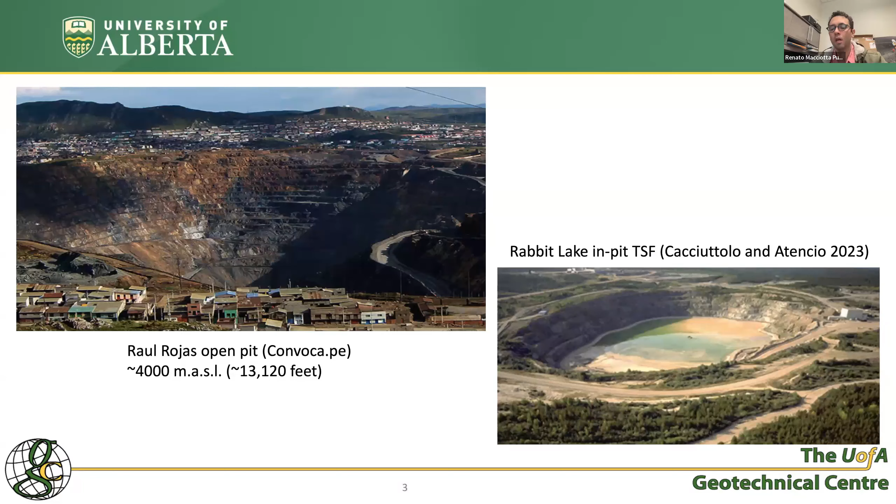Because if we're not, then we are increasing the likelihood of a mishap, of an incident from occurring. Okay, so that's the safety share for today. I hope you took the lesson, and I hope it's a free lesson for you. I had to suffer my back that day to learn the lesson by heart, but I hope you take that home today as well as what I'm going to tell next.

For this lecture, some of the contents will start with the context of open pit wall design. What is it that we're trying to do with these designs? I'm going to talk about uncertainty and design reliability. And then I'm going to talk about the specific work we did with the LOP on design acceptance criteria that considers that design reliability.

So let's talk about the context. When we talk about open pit slope design, we're typically talking about the design of these slopes at three scales, right? We're talking about the bench scale, the interramp, and overall. What's a bench? A bench is just a slope that is typically 8 to 15 meters in height, although some operations can have double benches, but let's not dwell on that. And then there's a space in between the next bench.

Their main purpose is to be a control for rockfall. Okay, so to try to catch any rockfall, any failure that would occur at the bench scale, and prevent it from reaching the working floor, the working level. It has, depending on the location, other objectives, such as helping you manage surface water. But in essence, for the most part, it has to control rock.

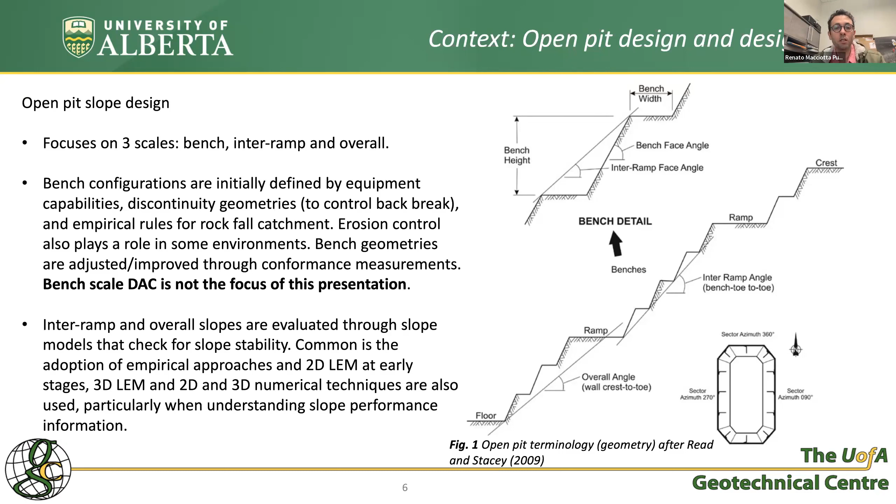Lately that has been implemented to optimize these designs as we transition in open pit mining from a prescriptive approach, in which factors of safety and probabilities of failure from slope stability calculations dominate, to a more performance-based approach. What do we know about the behavior of the slope? Can we monitor it? Is monitoring telling us that the performance is adequate? But the role of modeling and calculating still is prevalent in industry, and it's still a very key role in the initial stages.

So how do we get to a slope stability analysis? What you see on the right-hand side I've borrowed from the design workflow in the LOP guidelines for slope stability, for open pit slope design, from 2009. Of course, you have field data that then gets interpreted into geological models, structural models, rock mass models and characteristics, and hydrogeology.

And then all of that information has to feed the engineer with what are the potential deformation and failure mechanisms, because that is going to rule what assumptions and simplifications you need to make from the geological model, structural model, rock mass model, and hydrogeological model, so that you can build a geotechnical model that is practicable for your analysis but that captures the potential deformation modes and failure modes.

And based on that, you start building your domains, strengths, structures for that model, and then design sections, etc. And that's how you reach that level where you start carrying out the stability analysis.

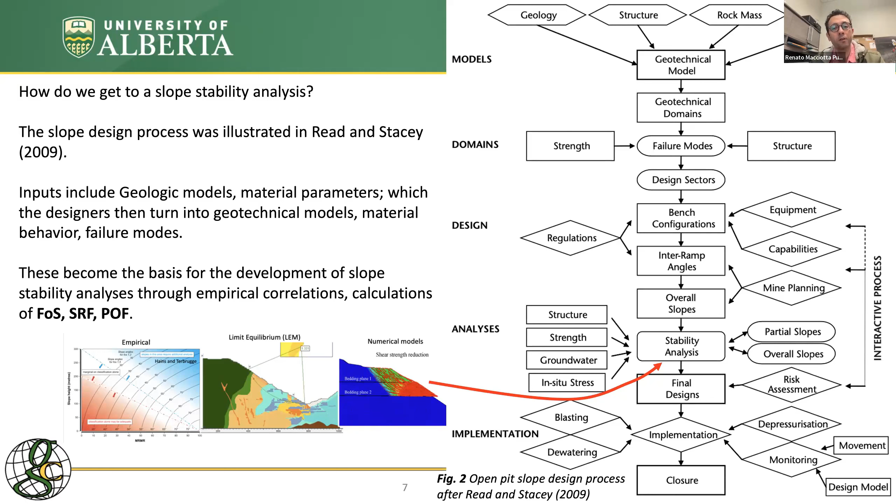Now we start the stability analysis, which I said is governed by empiricism at the initial stages to give you a ballpark of what's going to be the geometry, and then you move towards limit equilibrium analysis, typically in 2D. When you find an area that needs to be prioritized, that needs a bit more scrutiny, more work, or if you have some failures, then you move towards numerical techniques to calculate strength reduction factors in 2D or 3D.

Now, of course, to be able to decide if a slope is safe enough or not, we need criteria. There's been criteria proposed in the past. Many people have proposed criteria in the past.

But that was summarized and somewhat synthesized in those 2009 guidelines by Read and Stacey. That was based on all that published data, experience from them both, and the people involved in those discussions, and it was part of the LOP. So you can understand that many representatives of the operations were present in those meetings. What you see here in that table is what they came up with. You have values of factors of safety and values of probabilities of failure.

For example, if we look at the slope scale for overall stability, very wisely, they are giving you guidance depending on the consequence of the failure. If the consequence of failure is minor - there's not going to be anyone working on that side, the slope is near final, or there's no mineral associated with that slope because you've already taken everything you wanted, there's no interramps going through there, no structures, no people exposed, and it's low risk - you can be a little more aggressive with your design.

But if there's a good ore body there that you want to extract, or if you have a key ramp going through that slope, or if for whatever reason you have your main crusher at the crest or toe of that slope, then it's a very high risk. So you cannot be as aggressive with your design.

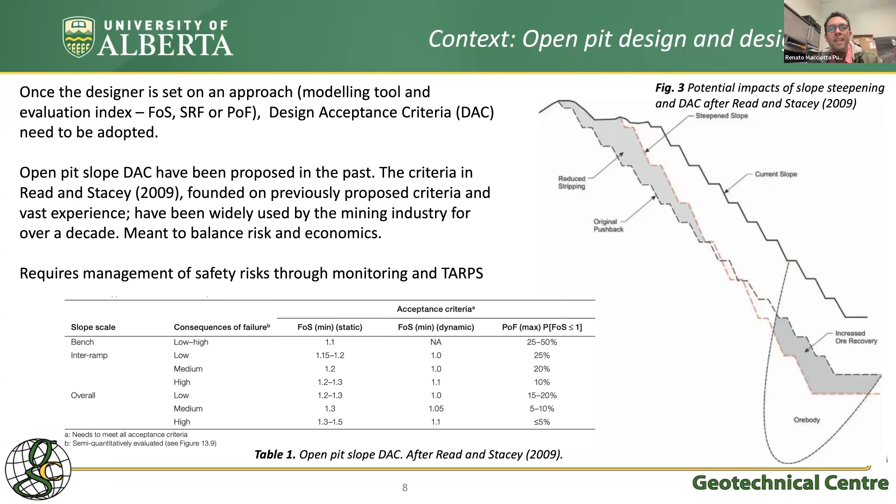Those two calculations with those two models are going to be very different. One is going to have very low reliability—very, very low confidence on those numbers. The other one you're going to feel much better about. So that's what was not captured here, that uncertainty associated with some of these analyses.

So what is uncertainty? What is design reliability? I'm going to show you what I call a working table. I've presented it a couple times, but I have not invented it—I've borrowed it and Frankensteined it from other people, mostly from Dr. Morgenstern's 1995 work, where he talked about categories of uncertainty, and from Steffen et al. in 2008, where he talked about sources of uncertainty. And then this is what I put together.

On the left-hand side, I've put this typical staging, which includes design from conceptual towards operations, towards design for closure, etc. When I talk about design during operations, I'm talking about subsequent phases of an open pit excavation. I've put these as well for tailing storage facilities and for natural hazards. For tailings, for example, if you need to do subsequent raises of your tailing dam, this is applicable as well through operations—uncertainties through implementation and operation, and uncertainties through closure, implementation, and post-closure.

So for each of these stages, we have sources of uncertainty, and the components include the geological setting, rock mass, soil, rock structures, tailings. We have the loading and unloading for performance analysis. And for each component, we'll have certain sources.

When we're talking about the geological setting, what are the possible sources of uncertainty? Topography, not so much, but there's some source there. For sure, the geomorphology—if you're in an area like some of the pits in the Andes in Chile, for example, very thick layers of materials carried by ancient rivers that got really solidified there. So uncertainties with that geomorphology, uncertainties associated with lithology, and even with weathering and hydrothermal alteration.

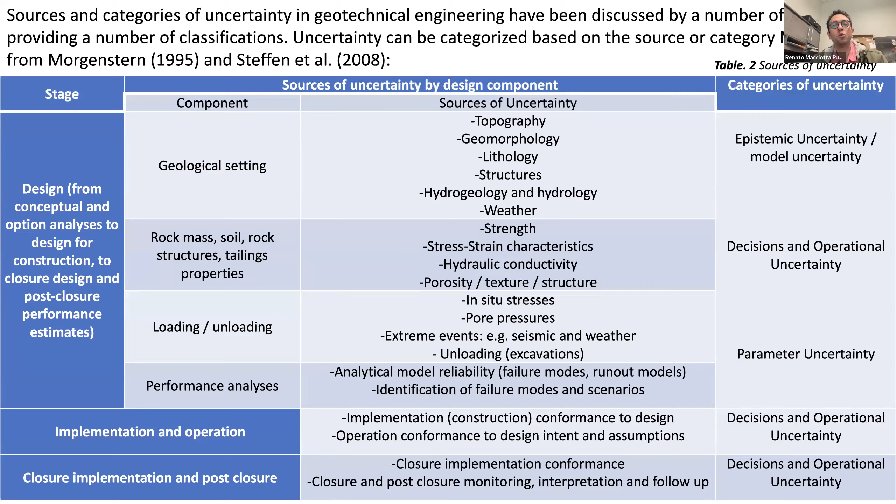And the other type of uncertainty is what I call here decision and operational uncertainty, what used to be called human error. That has to do with the decisions we make - for example, through the definition and interpretation of these geological structural models. How do we do the interpretation? There can be error from practitioners there, but also decisions we make during the analysis and interpretation of the analysis results, and decisions we make with regards to implementation and interpretation of monitoring.

So that's a big one, okay? And it's very difficult to deal with. We're not going to talk about that in detail in this presentation. Just know that that's why we have our system managed - our safety management systems, our design management systems. That's why we have peer reviews, senior reviews, external audits, technical audits, and external review boards. All those layers of protection are meant to reduce human uncertainty in this workflow.

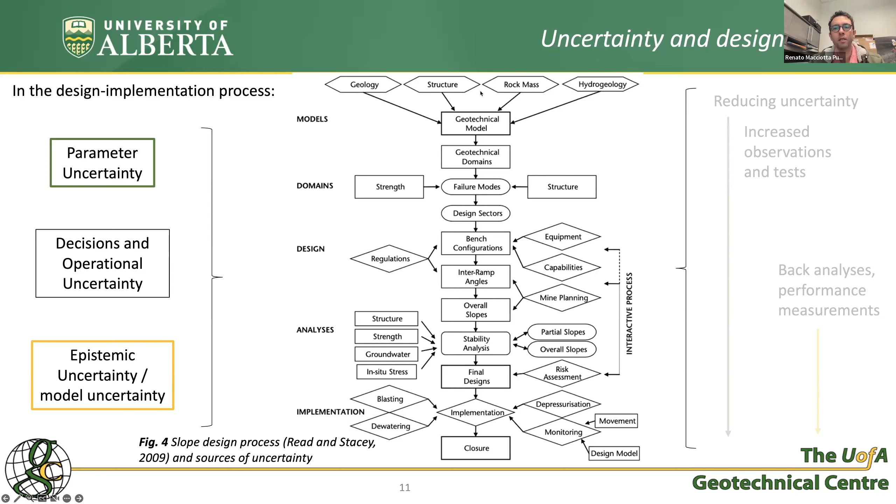Parameter uncertainty, of course, affects where we're doing the stability analysis. Epistemic uncertainty affects when we're doing the interpretation of those models, converting them into geotechnical models, et cetera. Now, we've become really good at dealing with parameter uncertainty, right? So we have a slope, as you can see there, very simple on the left-hand side. Let's say we want to understand what the uncertainty in parameters is giving us.

So instead of going for a factor of safety, we might decide to go for a probability of failure. How do we do that? Some of you here are probably experts on this, some of you might have heard of it. So I'm briefly going to share with you how this is done. You have your model here, your slope, your units - you can add structure if you want. It's typically done with limit equilibrium because it's easier, but you can also do it with numerical models - it just requires a bit more effort.

And then instead of providing your model with an estimate of the parameters, you provide your model with a distribution, a probability density function of the parameters. So if you have it - let's talk about Mohr-Coulomb, which is easier to understand - if we talk about a friction angle, instead of giving it 35, you give it a probability density function that goes, say, from 30 to 37. And then there's a number of ways of doing this.

You can use first order second moment type techniques, and you can use point estimate type techniques. There are others, and what they do is take certain values of those parameters based on the probability density function. They do the stability calculations there, and then, assuming normal distributions, they can give you a calculation or an estimate of your probability of failure.

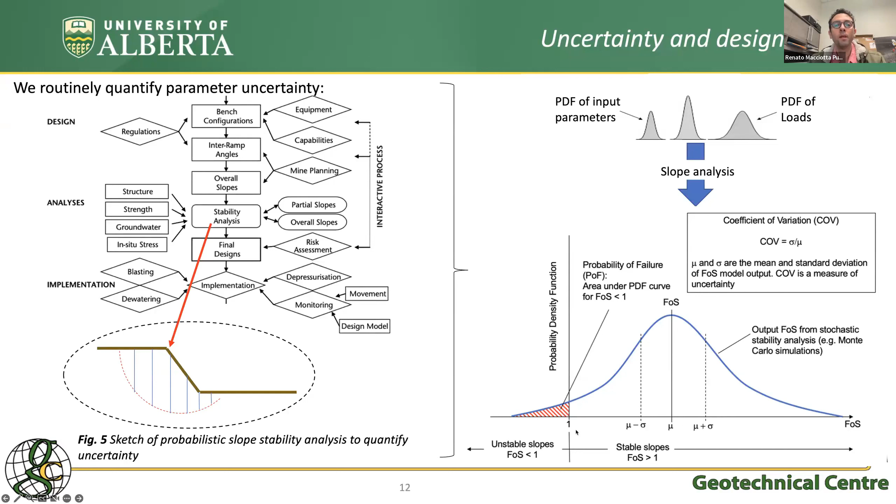If you do a limit equilibrium model, then you can use another technique, the Monte Carlo type simulation, where you just input your probability density function. It runs a whole bunch of scenarios, and it gives you the result in the form of a probability density function of the calculated factors of safety. And then the area under the curve that is below 1 gives you the probability that the slope is going to fail. That's how that is dealt with - relatively easy. When we go into epistemic uncertainty, however, things get a little bit more difficult.

Conceptually, we understand that if you have parameter uncertainty, you can calculate based on your limit equilibrium or your numerical analysis a distribution of possible factors of safety, which will give you a calculated probability of failure. What epistemic uncertainty is doing is actually making that distribution a little bit wider.

Now, this is very conceptual. Why is that? Because if the epistemic uncertainty is associated with the possibility of different failure modes, and this is very important, then if you run a limit equilibrium for those two failure modes, the distribution of the factors of safety can be skewed, they can be moved. Therefore, adding epistemic uncertainty to this could result in bimodal distributions of that factor of safety.

But the concept still holds. What epistemic uncertainty is doing is increasing that probability of failure calculation, increasing that distribution.

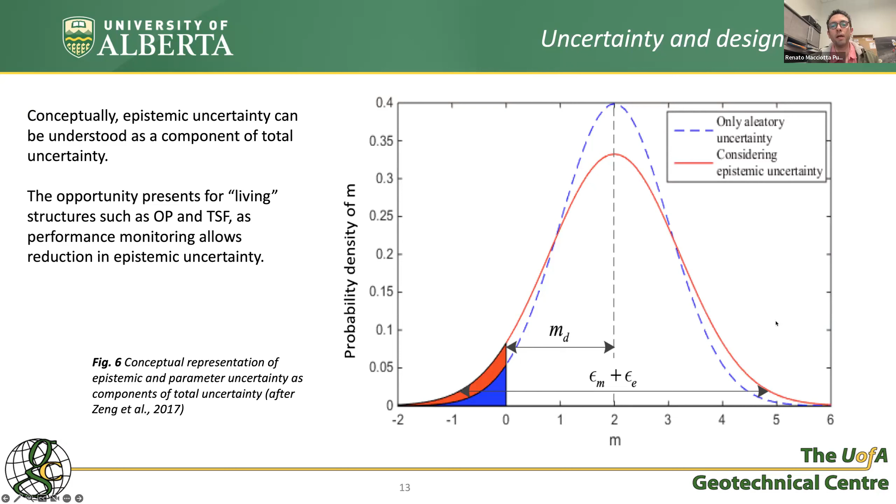We've done some research, and we've been able to capture two different failure modes by doing these type of exercises, and we are seeing those bimodal distributions, not because something's wrong with the calculation, but because depending on the buildup of the model to address two potential failure modes, the results of factors of safety don't have to match and be centralized in the same location. So you start getting these bimodal distributions - not a nice distribution with a single peak, but something that gives you perhaps two peaks.

Now, this was recognized early on when we were doing quantitative risk assessments of slopes. This is a very important concept, because when we run a limit equilibrium or numerical technique and calculate a probability of failure, typically people have been thinking that they can take that probability of failure as the actual probability that the slope is going to fail, and use that for a quantitative risk assessment. That's not really the case, right?

Because that probability of failure out of a stochastic analysis is just that - you are not accounting for other sources of uncertainty, such as potential for implementation uncertainty. What if they overmine? Or unforeseen geological conditions, or unexpected high water tables, or poor blasting, or extraordinary events like the one-in-1000-year event coming in the next couple of years, right?

So that has been recognized, and that probability of failure has to be, not calibrated, but weighted - like they did here at Terbrugge et al. - to try to find that real probability that the slope is going to fail. So that is what epistemic uncertainty is giving us.

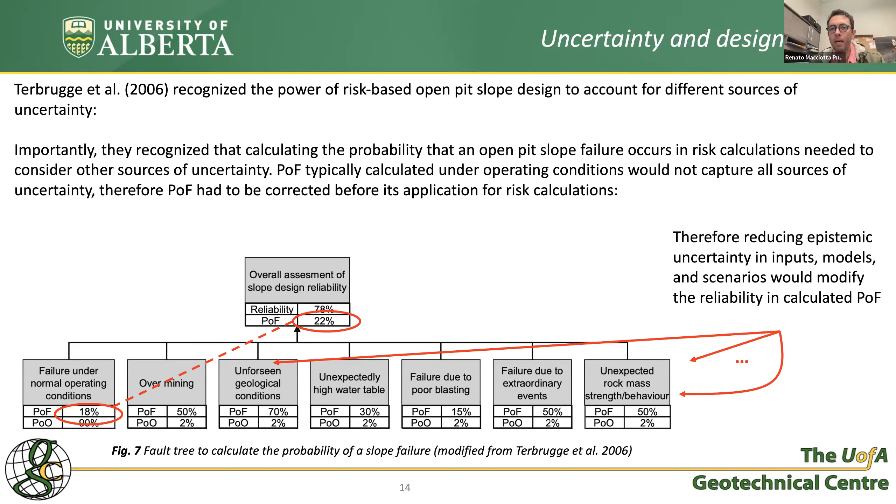Now, how do we reduce that epistemic uncertainty? How is that epistemic uncertainty reduced? Well, as we increase the effort in engineering at the initial levels, rather than using a couple boreholes for mineralogy assessments, we actually have our geotechnical boreholes, our in-situ testing, our laboratory tests.

But then when we start implementing the design, we are doing the excavation, and we can monitor the excavation. Then we can do numerical back analysis of the excavation, and we can understand what's going on - what are the mechanisms leading to the deformation we're measuring. And that starts confirming or updating our geotechnical models and our understanding of the behavior of that material.

What are we reducing there? We're reducing the epistemic uncertainty. Yes, a back analysis reduces the parameter uncertainty as well, and that's what we've been taught - that's the first thing that comes to mind when we think about back analysis: oh beautiful, I'm gonna nail down the parameter. Yes, you're gonna nail down a parameter, but more importantly, you're gonna be reducing that epistemic uncertainty. You're gonna be more confident about what's going on with that slope in terms of mechanisms.

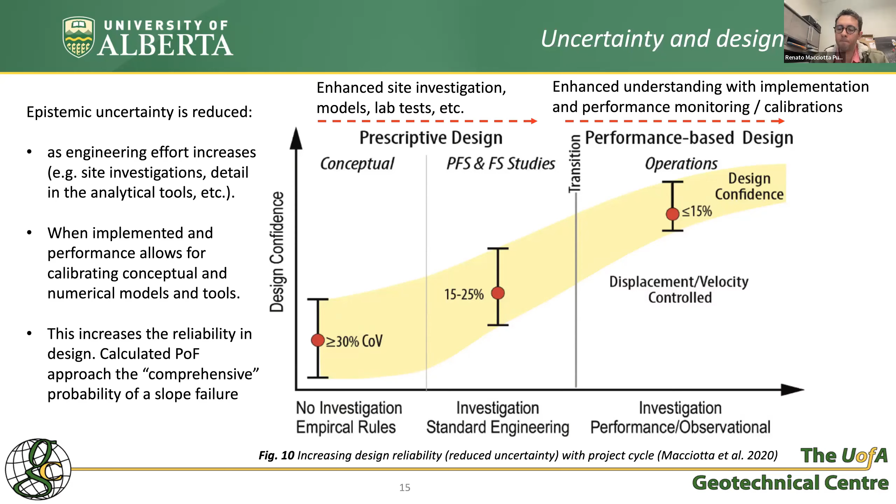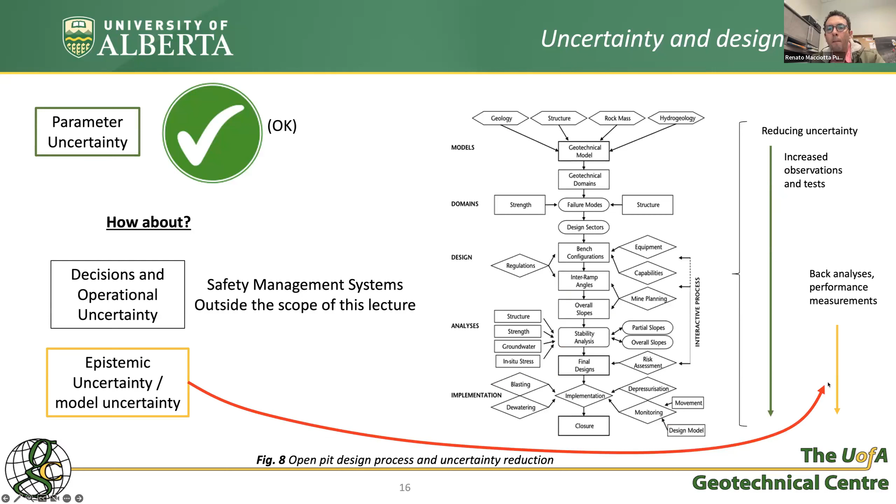So we're good with parameter uncertainty, epistemic uncertainty, increased efforts, and back analysis and performance. But then the question is, how much effort? What does it mean, engineering effort? What does it mean, a good level of engineering effort?

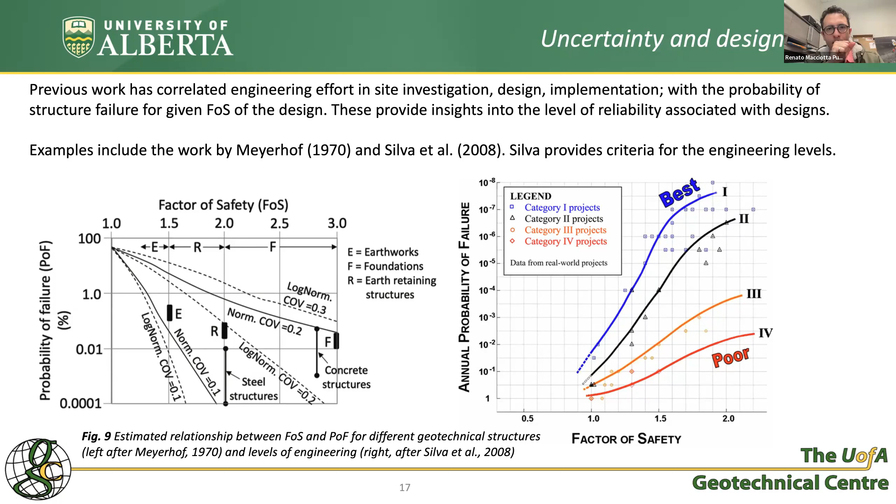Now, caveat: some people have used this to map where they are in this table, their factor of safety, and try to back calculate a probability of failure. I don't think that was the intent, and be careful, because this is an aggregation of many case studies. It's not taking into consideration the particularities of your case study. So what this table is really good at is showing where you are at - what your factor of safety means in terms of relative performance, so therefore where should you go to meet your expected goals for that structure.

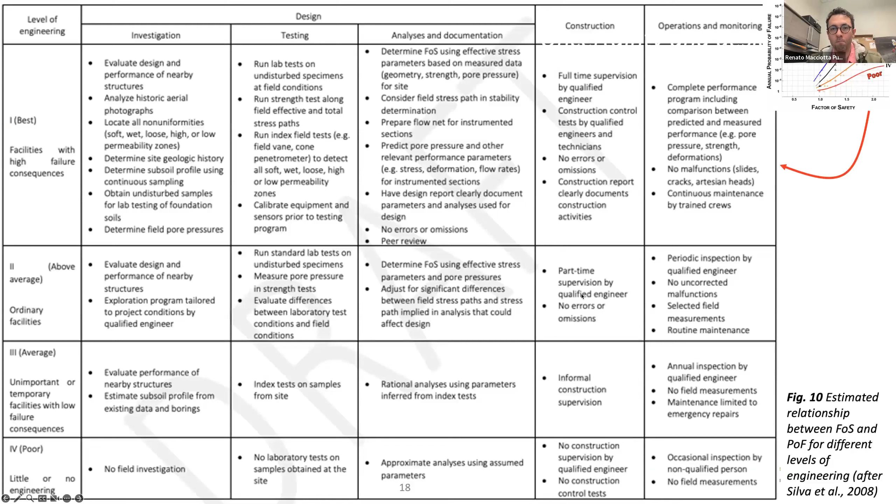Now, based on this work, we decided to leverage all that knowledge into making open pit design a little bit more efficient. This actually started with some work that Rio Tinto's Kennecott Bingham Canyon mine had done, following increased scrutiny of open pit slopes after the 2013 Manefay failure that you've probably heard of - that large Bingham pit failure.

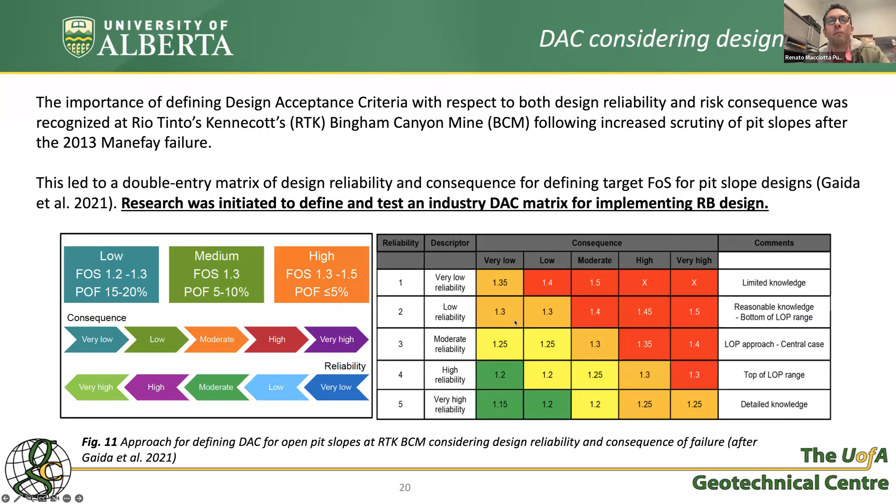That's what they developed, and that's when we, the University of Alberta, got involved with the LOP and Rio Tinto to try to put a little bit more context, to make it a little bit more systematic. We got a bunch of case studies from industry and plotted the calculated factors of safety and calculated probabilities of failure in that space of factor of safety versus probability of failure.

And when we talk to these operators, they say, well, sometimes we're very nervous, or we have an extremely critical structure, so we go with a very higher factor of safety. And sometimes we're so confident on how this thing is going to behave that we pretty much just do a performance-based design - we don't even calculate much factors of safety, and we're happy with the rate of failures that we're getting.

Because - and this is something I should have said earlier - an open pit that has no failures is a very costly open pit. There's a volume of failure that open pits tolerate in order to make it economic. And that's a balance between the cost of cleaning it up, maybe diluting some ore, and the costs of making it steeper or shallower, etc. But as long as it is a safe operation - and how do they achieve safe operations? By monitoring and trigger action plans.

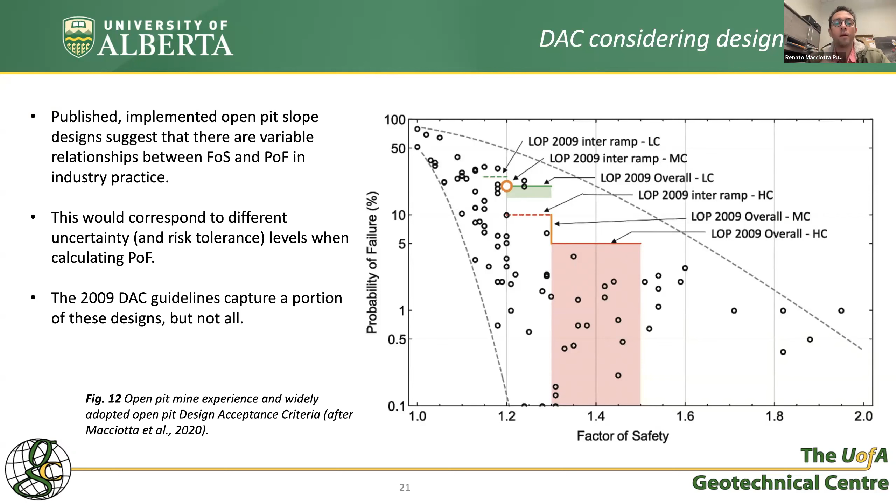When we saw this, it was very familiar to us because it starts looking like those two pieces of work that we showed you, where we have the same sort of spaces. These lines correspond to unique correlations between factor of safety and probability of failure. And then we had that understanding of the poor structures and the best structures. So we started looking at its consistency.

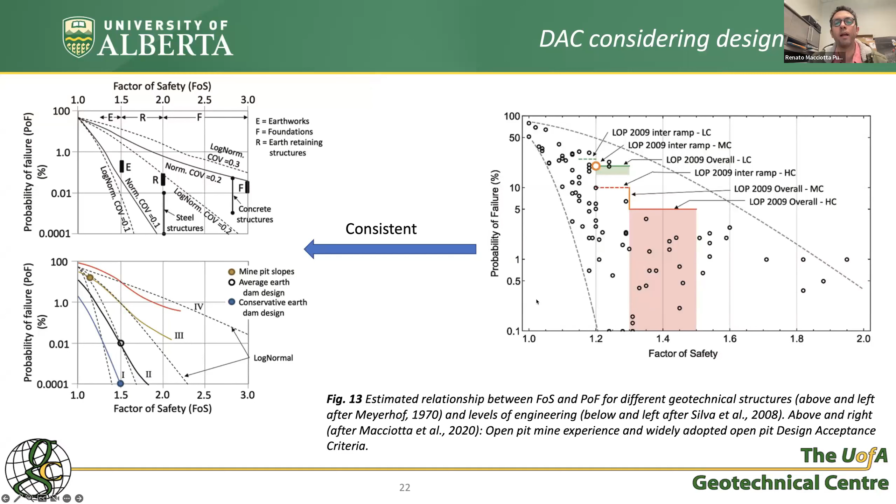We started mapping it. And then the second question was, okay, if we can leverage this context to be able to pair that reliability in our models with what would be adequate factors of safety and probabilities of failure through this work that was done before, we need to understand what's the relationship between factor of safety and probability of failure. We know it's within this range. What is the actual correlation?

That's done through the coefficient of variation. And what's the coefficient of variation? It's just normalizing the spread of the curve, the width of the curve. And how do we quantify the width of the curve? With the standard deviation.

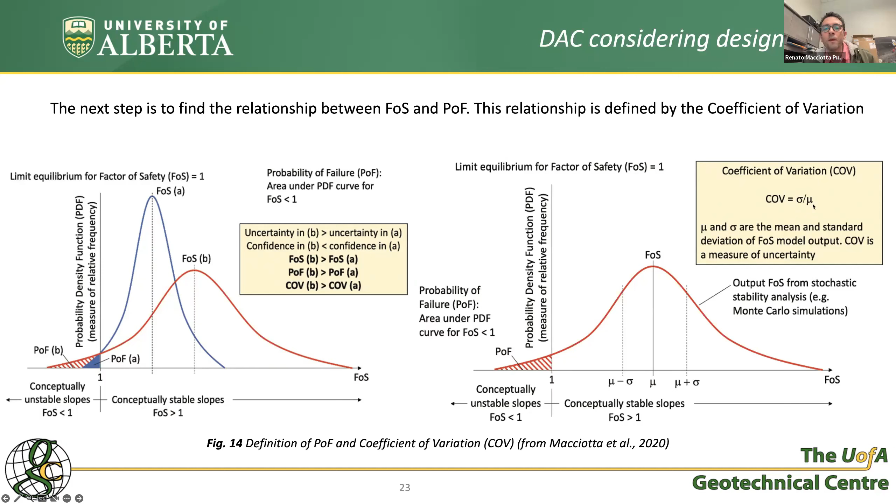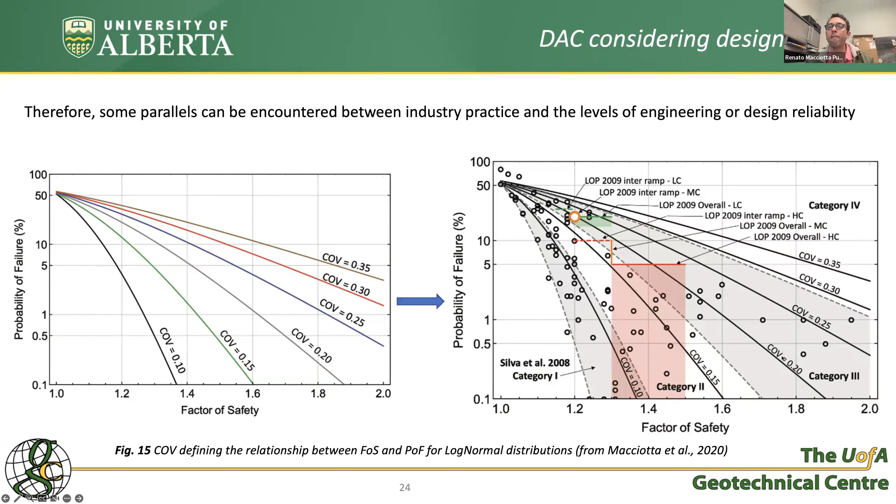And when we mapped that to our case studies, we saw that it matched pretty well what Silva et al. had proposed with the levels of engineering. So what did that mean? It meant that epistemic uncertainty at the beginning of an analysis, or when you have low probabilities or low information, you are dealing with a much wider distribution. We were dealing with increased uncertainty, and therefore you have to target higher factors of safety. When you start getting knowledge of those slopes because of increased effort in your engineering, or because you are already operating and getting that knowledge of how the walls are performing, then you have less spread in that knowledge, and therefore you can target lower factors of safety.

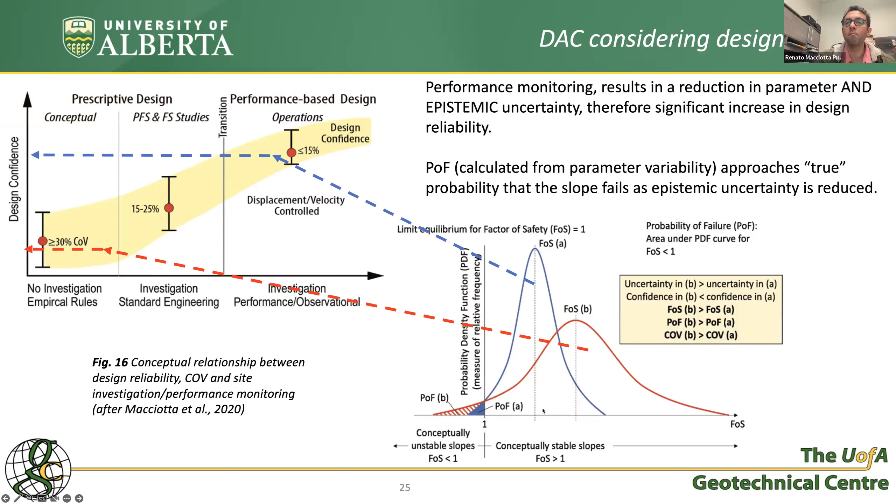So we did a review because we wanted to make sure we weren't missing existing knowledge. We found that in other industries, there had been research done on understanding levels of risk, not just as probabilities and consequences, but also as the level of knowledge. So we were moving away from tolerability being just about likelihood and consequence, but also asking how much you know about the behavior of the system when calculating that likelihood and consequence.

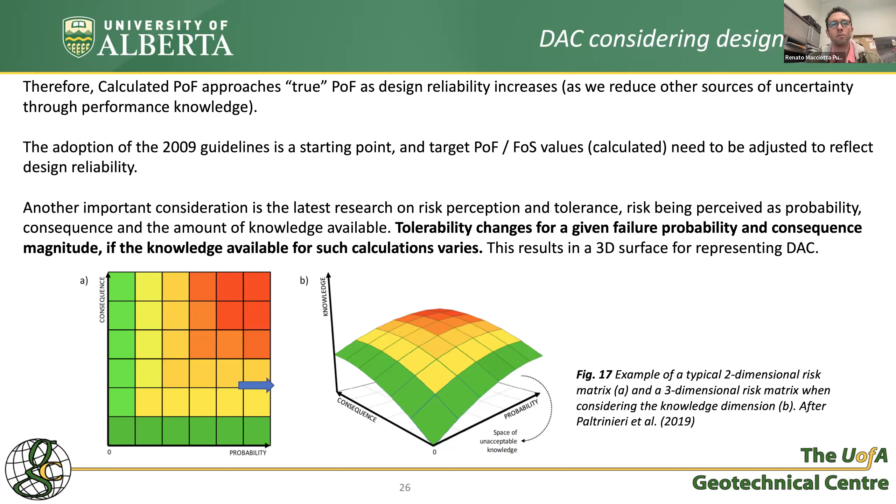That is very consistent with this train of thought. So we developed a matrix for design acceptance criteria, under the understanding that if you have more knowledge, you have a lower spread in that model uncertainty, and therefore you can be more aggressive with your designs. This is what these matrices show in terms of probabilities of failure and factors of safety. For a given economic consequence, say moderate, if you have low reliability in that design, maybe you should target 5 to 10% probability of failure. But if you have very high reliability, you know exactly how it's going to perform, you have very robust understanding, then you can go much more aggressive because you can take it economically, and you're monitoring pretty well. You're sure you can mobilize people away if something starts failing. Same thing goes for factor of safety.

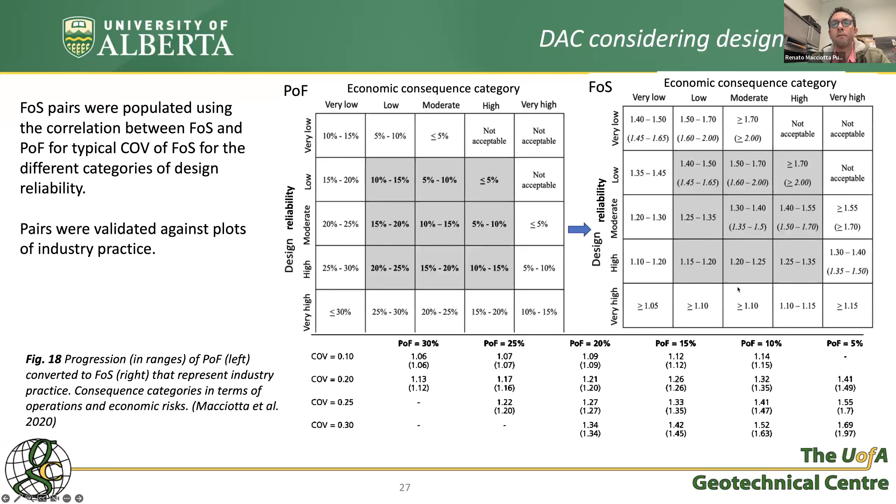So that has now become one option in the toolkit for an open pit operator, for when they see an opportunity to optimize design. The guidance from 2009 is here, the moderate reliability as in 2009. When you start conceptual analysis or conceptual designs, that's where you should probably target, because you're at a conceptual level, you're not there yet. But once you start operating, you need to judge yourself: am I at low, very low reliability, and therefore should be a little more conservative? Or better yet, should I strive toward higher design reliabilities so I could optimize my designs, which would allow me to be more aggressive. So that's how we see this working.

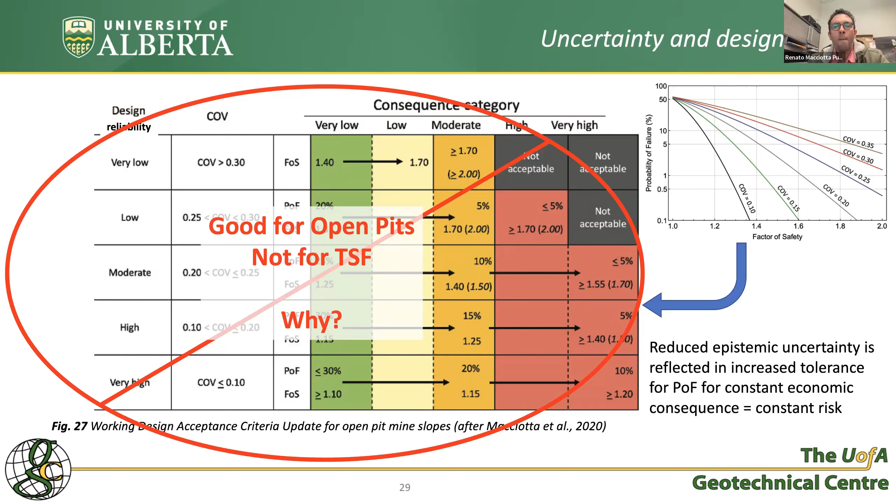Now, we've developed this for open pits. This is not for tailings storage facilities. Why not? Because of the very different risk profiles of these structures. In a typical open pit, and that's where engineering judgment comes into play, are you having the typical open pit design profile? In a typical open pit, it's very restricted to outside people, third parties who don't have permission to go into the pit. Failure volumes are very constrained to the pit footprint, and we have the capacity for cleanup of the footprint. We have very robust and redundant monitoring tools and TARPs so we can see a failure coming, and in a robust operation that understands its failure modes, we can mobilize equipment and people.

In the case of Bingham Canyon, they saw the failure coming, mobilized equipment, and people were taken out of the pit. The problem was that the entire volume of failure was misunderstood, so some equipment that wasn't mobilized out got damaged, but people were moved out safely. Environmentally too, everything is constrained within the pit footprint, which can be cleaned up. On a tailings facility, on the other hand, if you have a loss of containment, you cannot mobilize the environment out. And as we've seen unfortunately in some cases in Brazil and other places, it's very difficult to mobilize people downstream. So it's a very different risk profile, and the treatment of these facilities has to be very different.

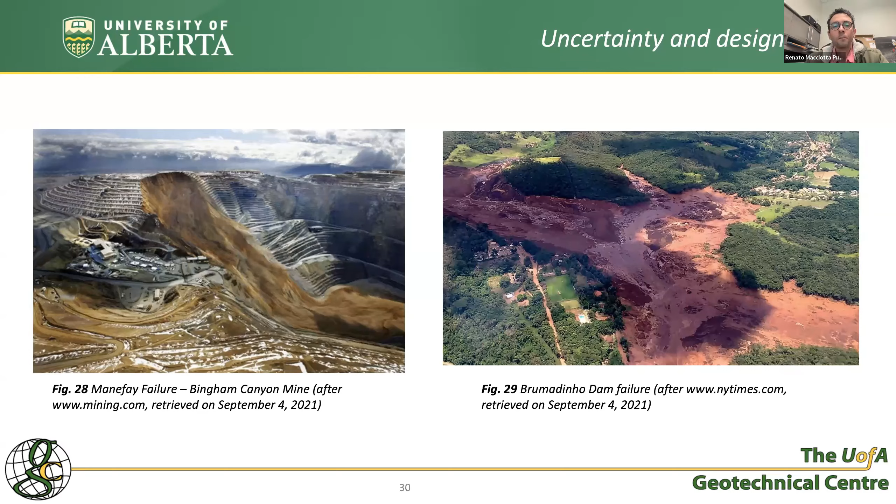Thank you for the presentation, that was great. It's always great to see probability being integrated into rock mechanics and engineering. It's so important to consider because we just know so little. I absolutely agree, thanks a lot.

So we have 3 questions in the chat or comments. Sharzad says, thanks Renato, that was a great presentation, I have to get to another meeting. Ed Siebritz asks, Renato, what do we know about what Bingham changed as a result of their slope failure? I would have expected it to already be carefully monitored and modeled. I guess you spoke about that a little bit. Yeah, that is correct.

I was not part of the team dealing with the failure, but I do work closely with a Rio Tinto specialist, and there were a few changes and updates to the monitoring and interpretation, particularly because they discovered the potential for that particular fracture system to generate larger failure modes than what was anticipated.